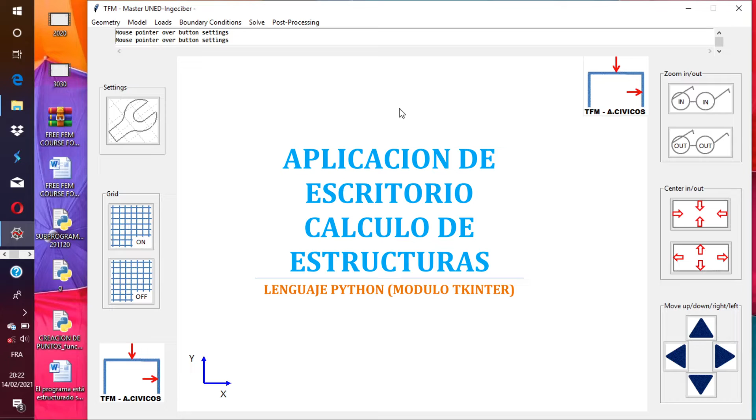Several master subjects offered me the possibility to learn how to code, first in Visual Basic and then in Python. The goal of this final master project is to go further and make software that can calculate any structure in 2 dimensions using the matrix method explained during the master.

The language I used in my final project is Python, for several reasons. Reason one: Python is an open source, general purpose scripting language. Reason two: Python is a high-level language, simple and very beginner-friendly. Reason three: it's very good for quick programming. Reason four: Python has a large amount of libraries available to be used in scripts, including linear algebra, big data analysis, numerical analysis, artificial intelligence, etc.

I chose a module called Tkinter to make the graphical interface of the program. As you can see, this is the main window of the program. I created a well-structured drop-down menu designed to make the program user-friendly.

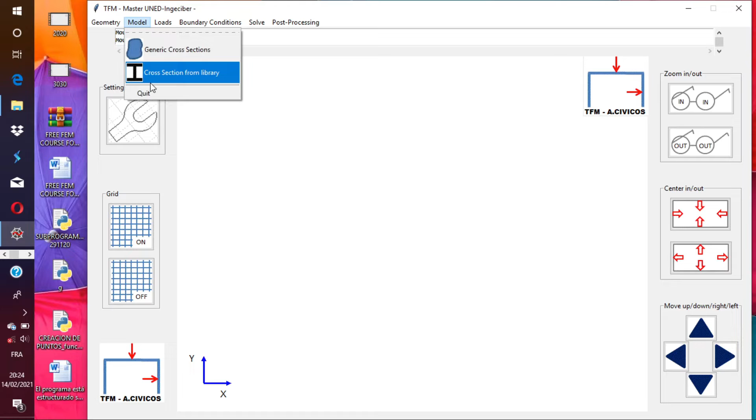The load menu allows you to introduce thermal load or gravitational load. This can be punctual, uniform, triangular, etc. In the boundary condition menu, the user can introduce a constraint of displacement or a constraint of rotation in the X, Y, or Z axis.

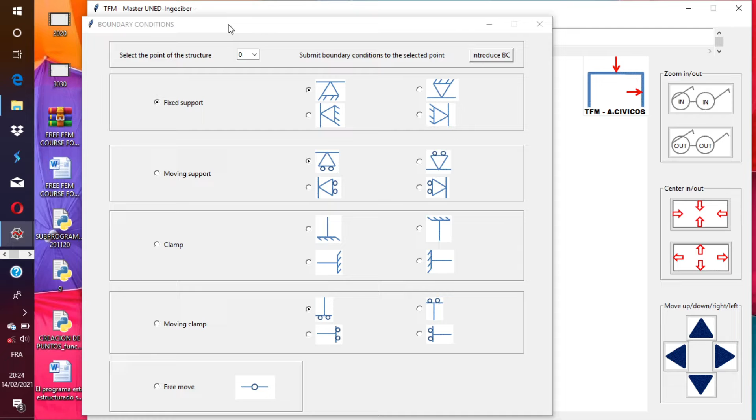The calculation menu uses the linear equations generated with the application of the matrix method in order to solve the structure. The user can also use the Cholesky method, which is more powerful in some cases.

For the post-processing menu, we can select the bar result, see the deformed model, and the total moment, the isostatic moment, and the hyperstatic moment diagram.

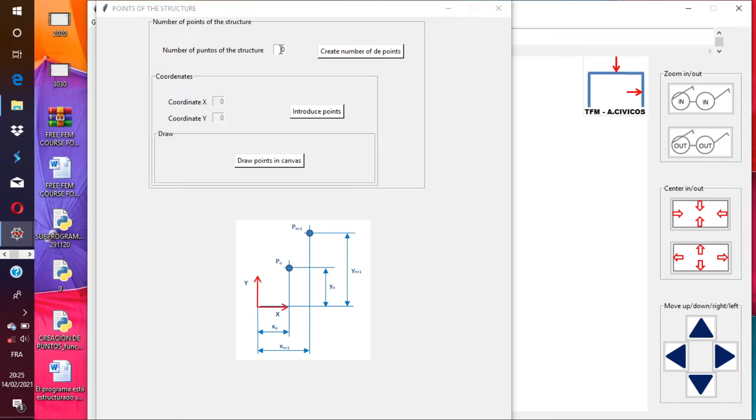Now we are going to demonstrate how the program works with a simple exercise. We are going to create only 3 points. Number of points of the structure: 3. We're going to introduce 3 points. The coordinate of the first point is 0, 0. The coordinate of the second point is 10, 0. And the coordinate of the third point is 20, 0.

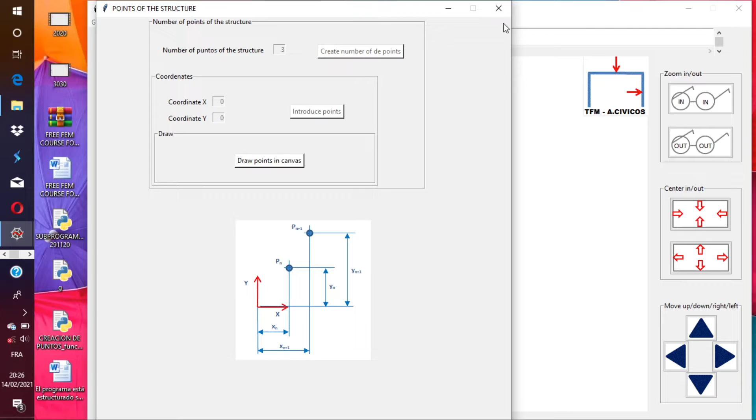Now we're going to draw in the canvas. As you can see, the 3 points have been created. Now we can move them with the mouse or with the center button of the mouse. We can zoom in or zoom out, also using the buttons located in the lateral frame, for example zoom in, zoom out, center in, center out, move up, down, left, right.

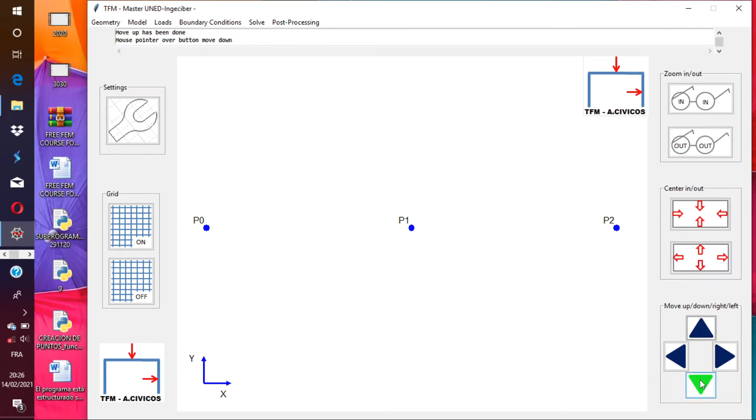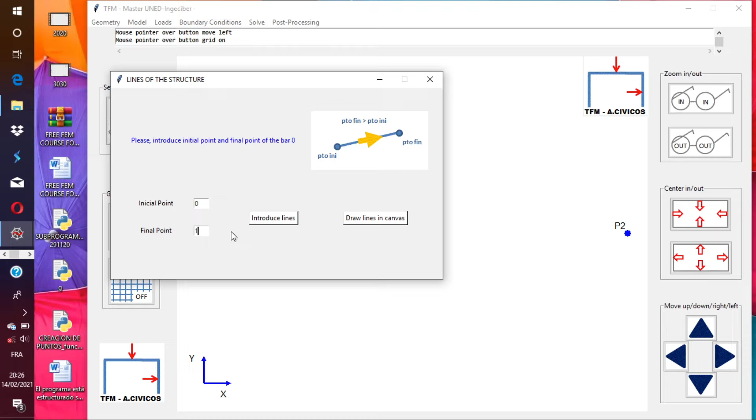The next thing we have to create are the lines that link the points. Geometry lines: the first line goes from initial point 0 to final point 1, and the second line goes from initial point 1 to final point 2. As you can see in the canvas, the lines have been created with orientation, which is very important, in the local axis.

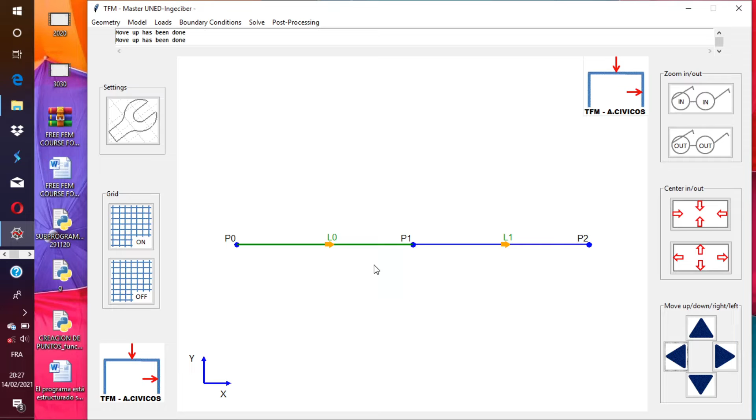We can create an additional grid with a chosen number of divisions and color. For instance, we can create 20 divisions with the color gray. But for me that is not very useful or interesting, so we are going to deactivate this grid.

Once we have created the lines, we have to give them the material and the cross section. For that reason, we are going to go to the model menu. We have two different ways to introduce the material and the cross section: generic cross section or picking a cross section from library. A cross section from library is very easy. Here we have to select one of the two bars we have created.

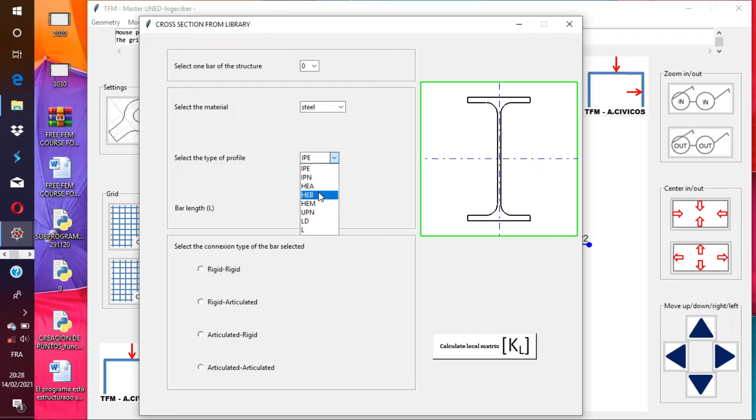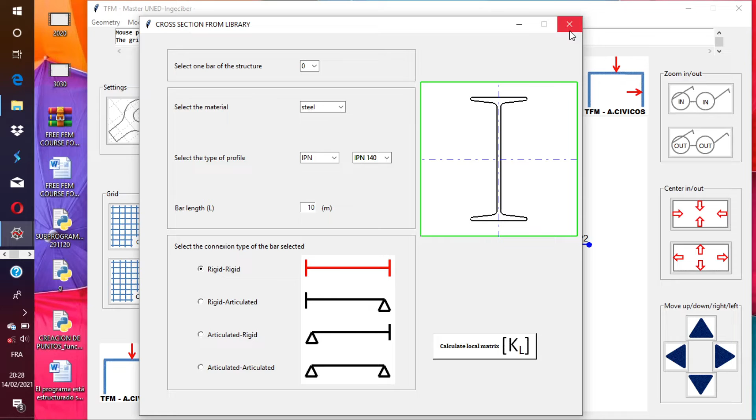We have to select the material, the type of profile, size. We have every single profile. We have to introduce the length and the connection of the bar. But we are not going to do it that way. We are going to select the other way.

Generic cross section. We select the first bar of the structure, the bar number 0. We introduce the Young's modulus. We introduce the inertia. We introduce cross area, and we introduce the length of the bar, and also the connection type of the bar.

Once we have introduced all data, we can calculate the bar matrix in local axis for the first bar, and for the second bar we are going to introduce the same data, so we can calculate the bar matrix in local axis, and then we can calculate the global matrix of the structure.

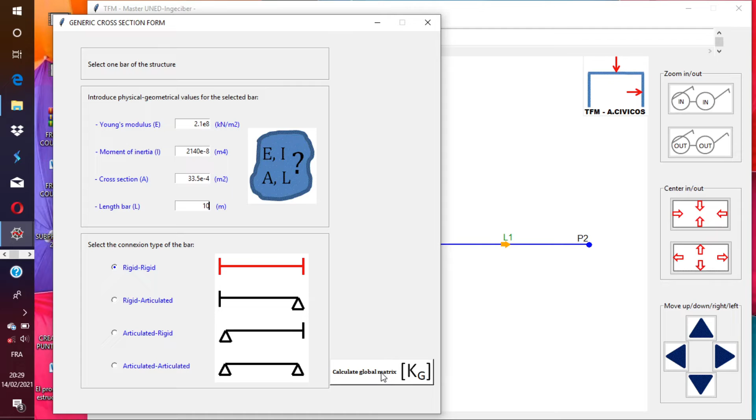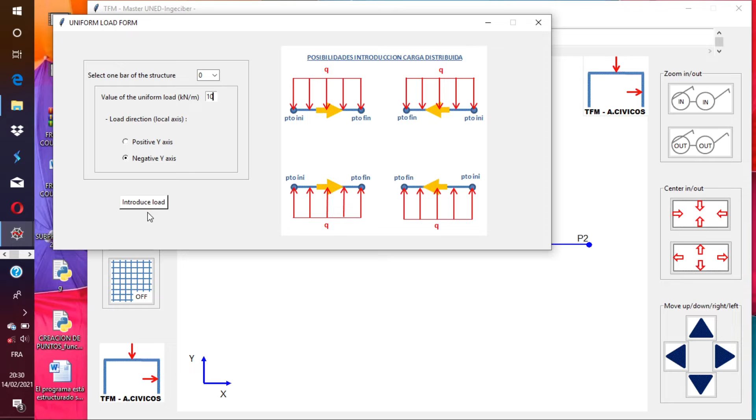The next step is to introduce the load. We are going to the load menu, and we are going to introduce gravitational load. Gravitational load, we are going to introduce uniform load in the two bars. For the bar number 0, we're going to introduce a value of the uniform load of 10 kilonewtons in the negative y-axis, and for the second bar the same thing.

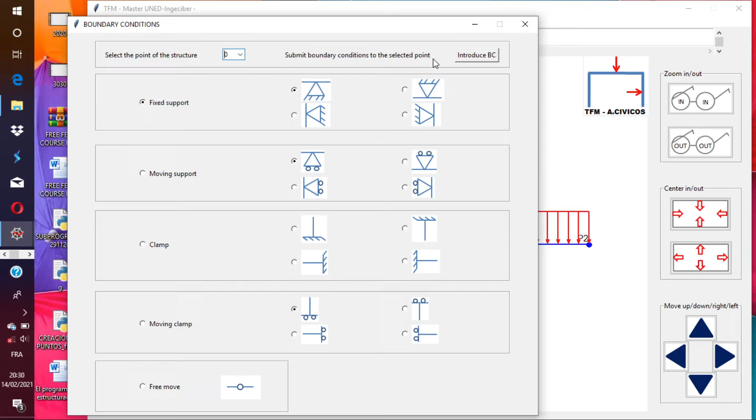And now to complete our structure, we have to introduce the boundary condition. We have 3 nodes. For the 3 nodes, we are going to introduce the simplest, the easiest, fixed support. That's this type. So we're going to introduce it for the 0, for the 1, for the 2.

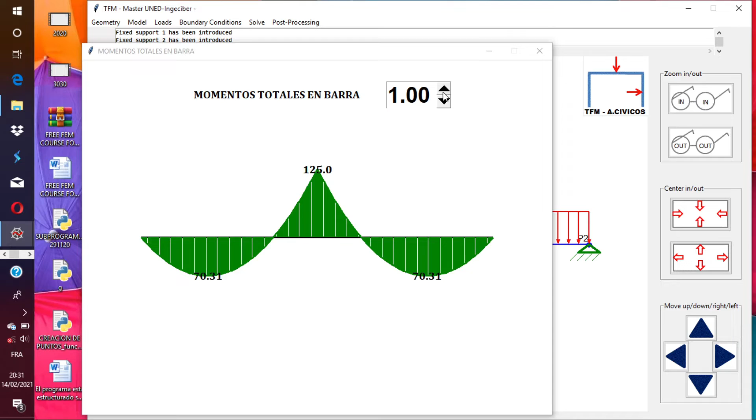Now we have to solve the problem with Cholesky or matrix method. We are going to use matrix method because it's very simple. And now we are going to see the moment diagram, the total moments. We can see the isostatic moments. We can see the hyperstatic moments. We can see a lot of things.

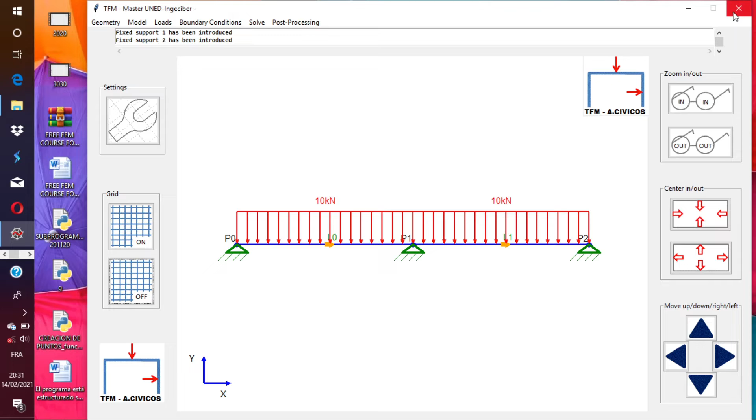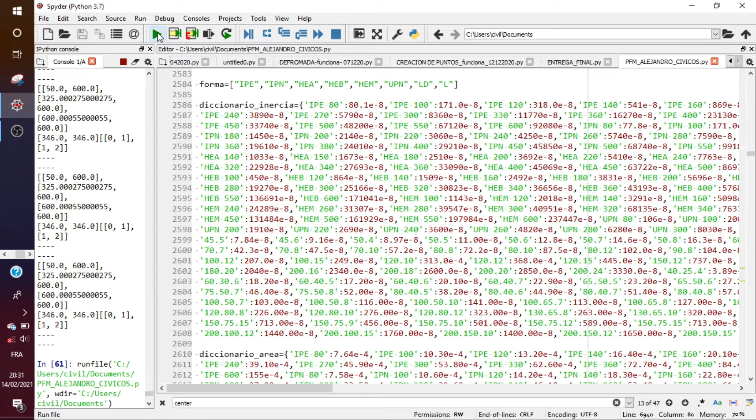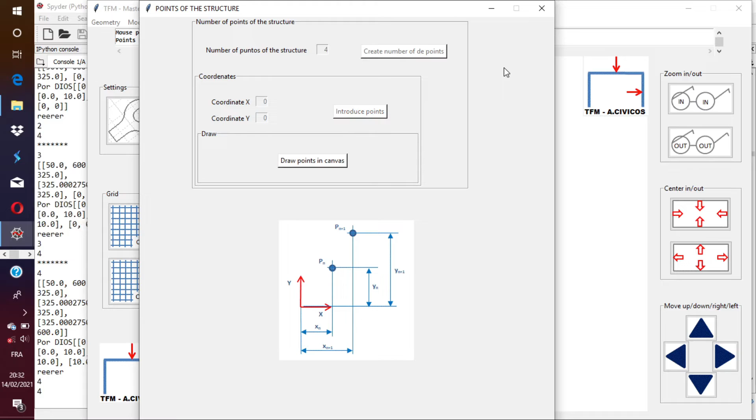But the last thing we're going to do in this presentation, we are going to calculate quickly another structure, a little more complex. I'm going to do it faster, only to show you. We're going to the lines 0, 1, 1, 2, 2, 3.

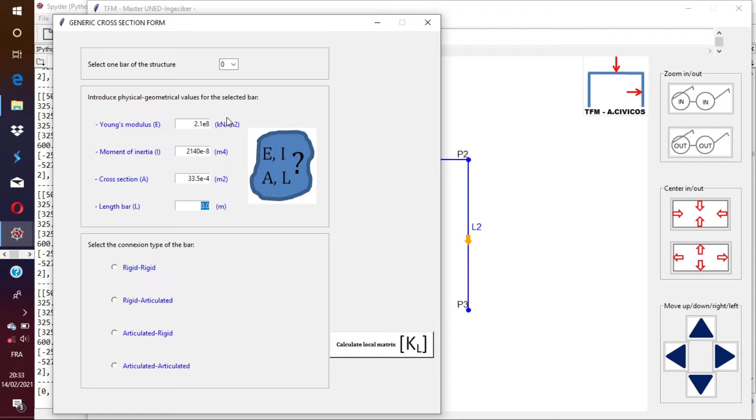Now we're going to select the cross section. Rigid, calculate for the first bar, for the second bar, and calculate the local matrix. Now we're going to create the loads, uniform loads in the second bar, the central bar, 10, in the negative y-axis.

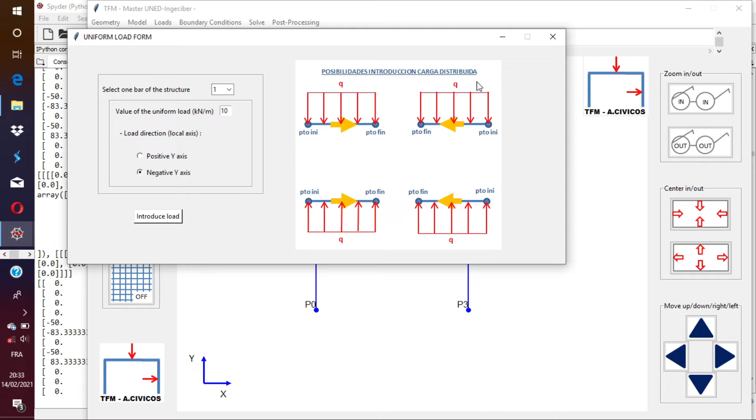And then we have to introduce the boundary condition, in this case, clamped for the 0 and the third node, and for the rest, free movement. Okay, and now we're going to solve with matrix method because it's a little structure, and then we're going to calculate the total moments.

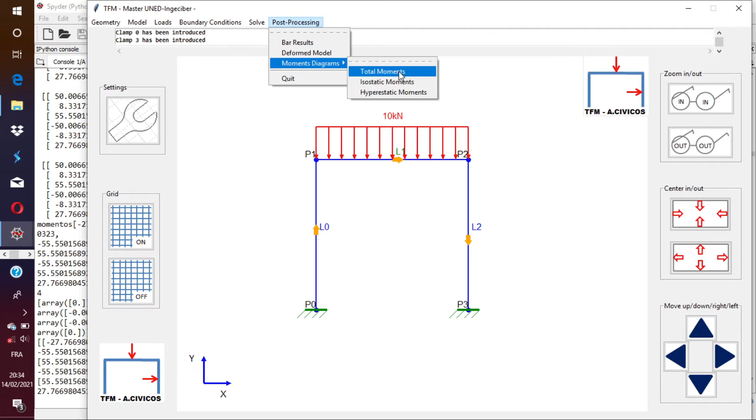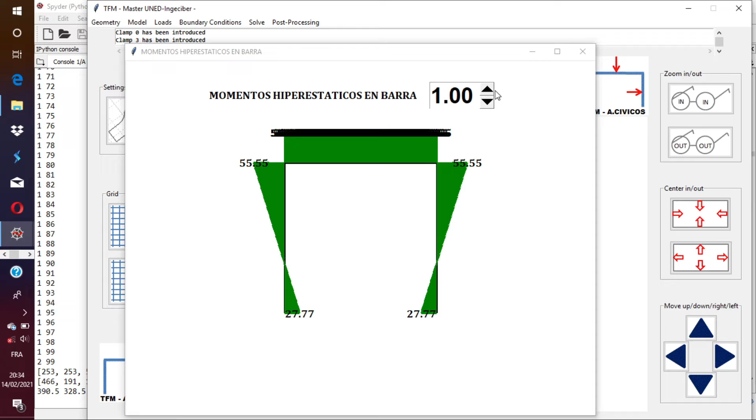We're going to show the isostatic moments. We're going to calculate the hyperstatic moments and the total moments. So that's a little bit my final project.

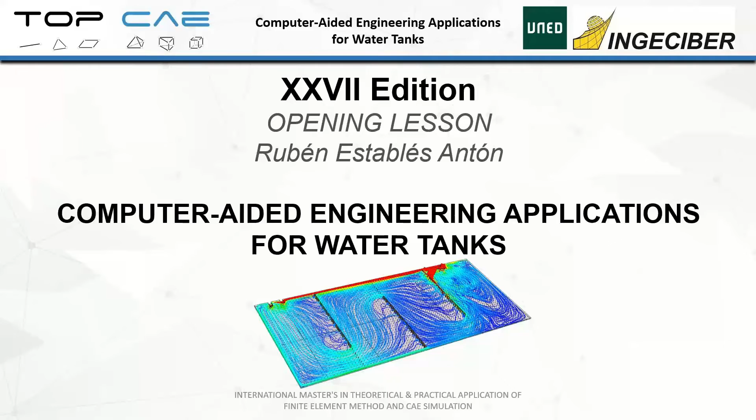Let me introduce myself. My name is Rubén Establés. I am a civil engineer, both bachelor's and master's degree. I have worked in aerospace, industrial, and civil engineering fields, and in all of them using finite element method and CFD simulation.

Also, I am a lecturer of dynamic and thermal analysis subjects of the mechanical branch with Patran and MSC Nastran. Actually, I am working as a research and development engineer in the TOP-CAE department, which belongs to INGECIBER company.

I have divided my presentation into 6 main parts: case study objectives, pre-process, which covers topics like inlet and outlet system, scale model, internal brick walls, fluid domains, geometry and mesh, and simulation hypotheses. Other parts are analysis, results, proposals for improvement, and finally, to sum up, some summary and conclusions. So let's get started with this topic.

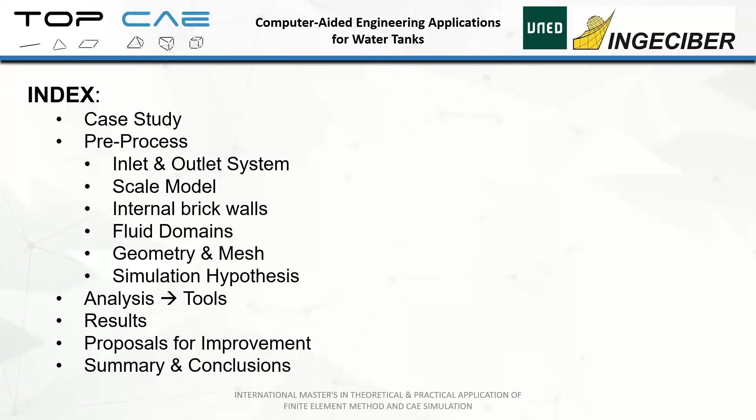First, I would like to talk about the objective of the case study, which is to evaluate the behavior of drinking water in a water tank using CFD simulation. Remember that the meaning of CFD is computational fluid dynamics. The input that we have to start was taken from drawings, photos, on-site visits, and in this case, data from a laboratory which studied the hydraulic behavior using a scale model.

The water tank has one rectangular chamber with the following main characteristics: dimensions with a length of 400 meters, width equal to 180 meters, and a height equal to 6 meters. An inlet system with a special configuration to reduce the water load when it enters into the tank through the pipes.

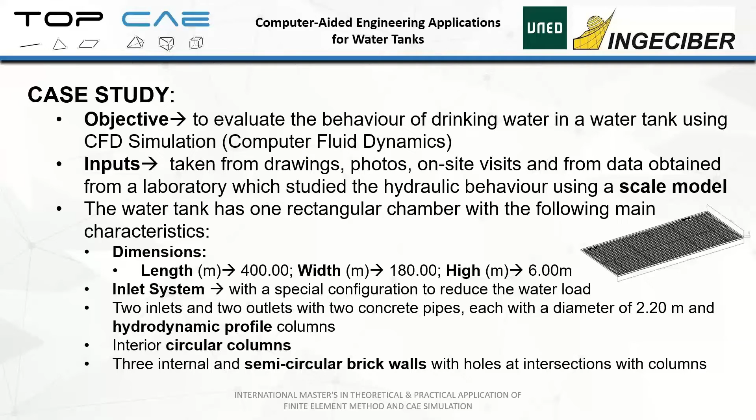2 inlets and 2 outlets, concrete pipes, each with a diameter of 2.2 meters and hydrodynamic profile columns around them. Internal circular columns, and 3 internal semicircular brick walls with holes at the intersection with circular columns. It is important to know that these 3 walls have straight walls at the end.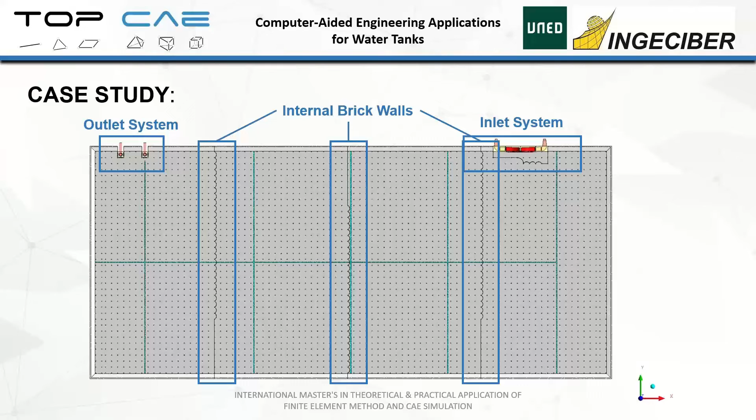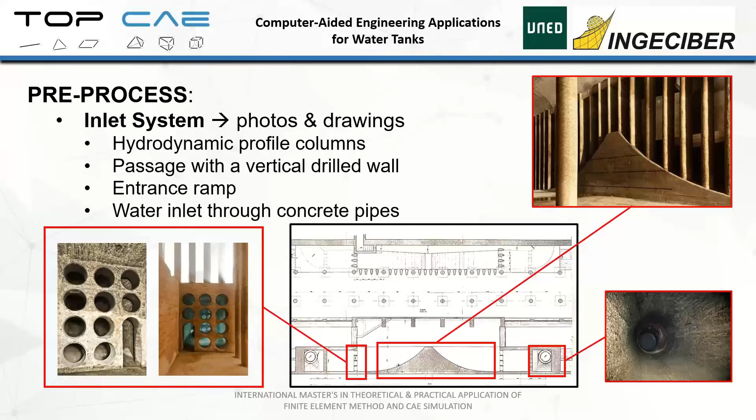The main parts of the water tank are highlighted in this image. These are the inlet system and outlet system, and to complete it, 3 internal brick walls. Look at the inlet system with hydrodynamic profile columns, a passage with a vertical drilled wall, the entrance ramp, and the concrete pipes. This slide shows some images of the real water tank and the geometric model made with the help of DesignModeler software.

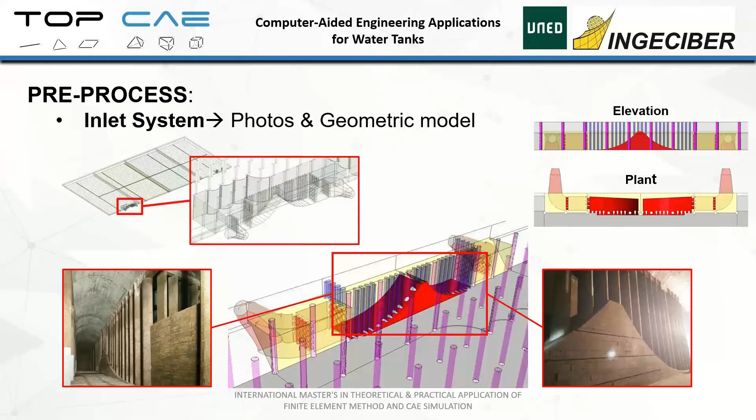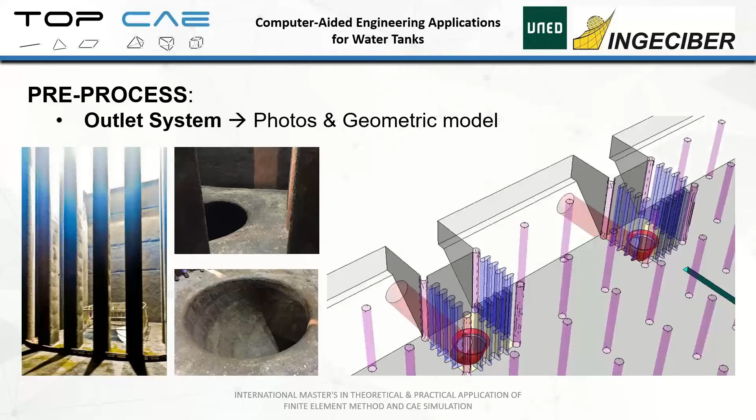The next slide shows real and model images of the outlet system, and here you can see the outlet pipes and the hydrodynamic profile columns around them. As I told you before, during the design phase, a scale model was made and it was used to study the real hydraulic behavior of the flow. In these figures, you can see the civil engineers working with this scale model.

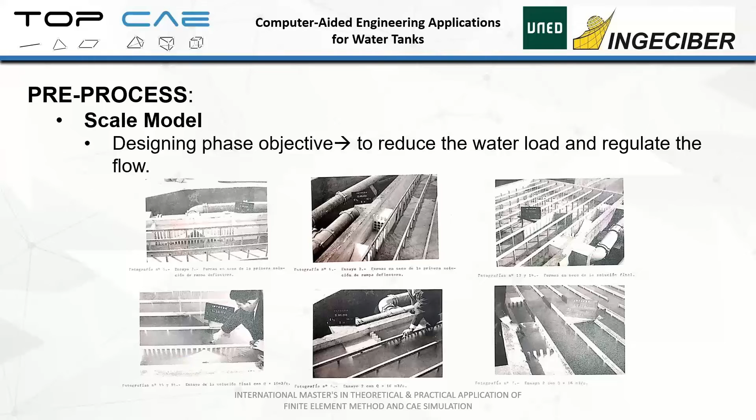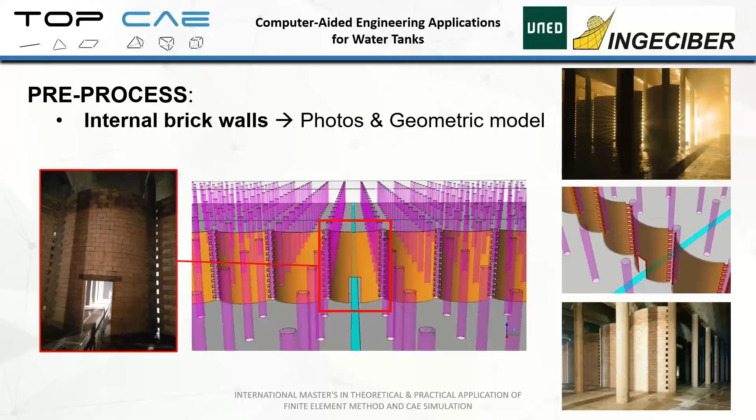3 internal semicircular brick walls are inside the water tank and divide it into 4 main parts. Remember that these walls have straight walls in their last spans. Due to its external configuration, the model is divided into 7 fluid domains that work together like one body. They are connected at the areas indicated by arrows in the images below.

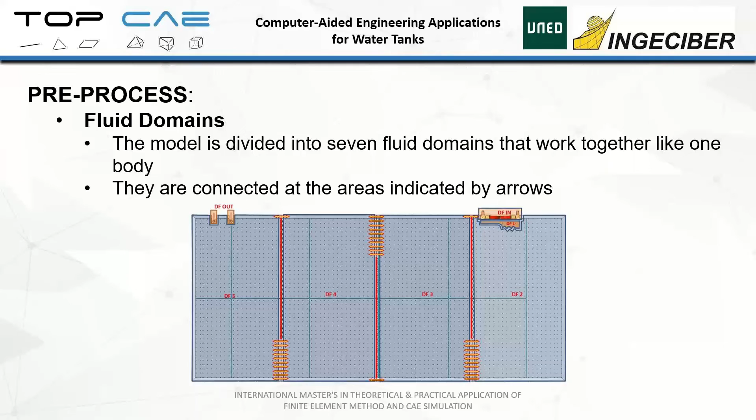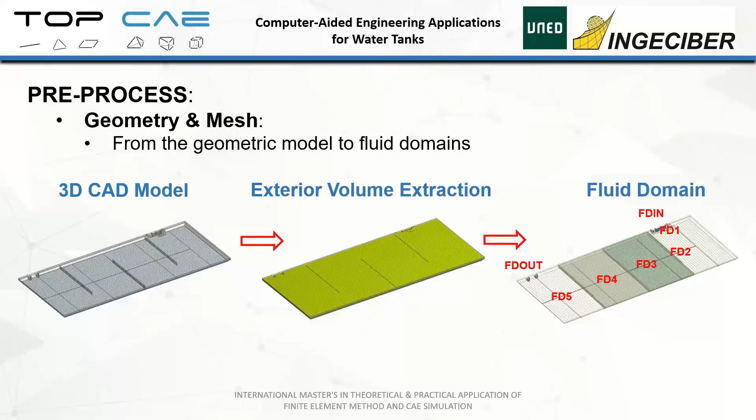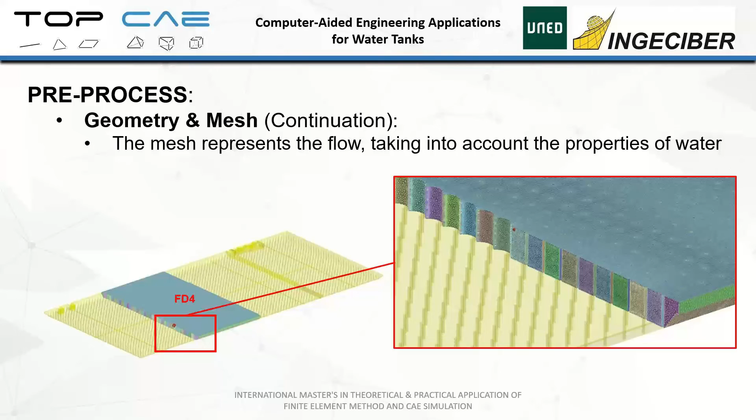To finish with the pre-process part, I would like to talk about some simulation hypotheses. It is a steady state analysis. The mass conservation law is fulfilled. Flow in is equal to flow out. It is important to define the mesh continuity between fluid domains, as you can see in 3 images.

And finally, I give you some main data. For example, water level is equal to 6 meters. Flow in is equal to 1.4 cubic meters per second. The flow out is equal to 5.1 cubic meters per second. The volume is equal to 418,000 cubic meters. And finally, we achieve a renovation time equal to 64,000 seconds.

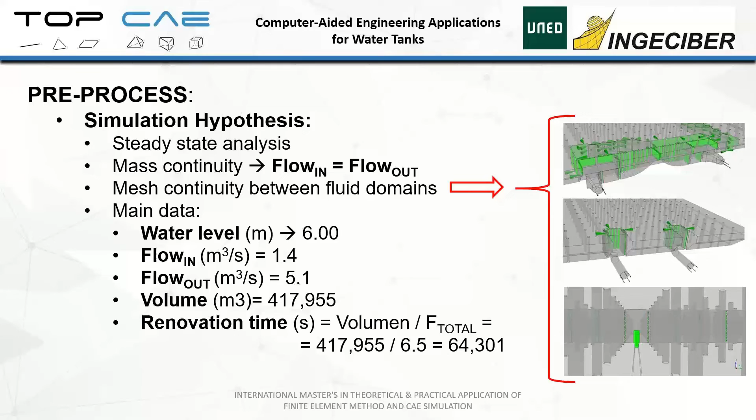Now let's move on to the next topic, which is analysis. The tools that are used to complete it can be divided into software and hardware. The software: DesignModeler is used to define the geometry and mesh, this is the pre-process step, and ANSYS CFX to do the analysis and post-process. The hardware is a Windows server, very powerful and robust, because the analysis takes 5 days and the size of the result file is equal to or more than 10 gigabytes.

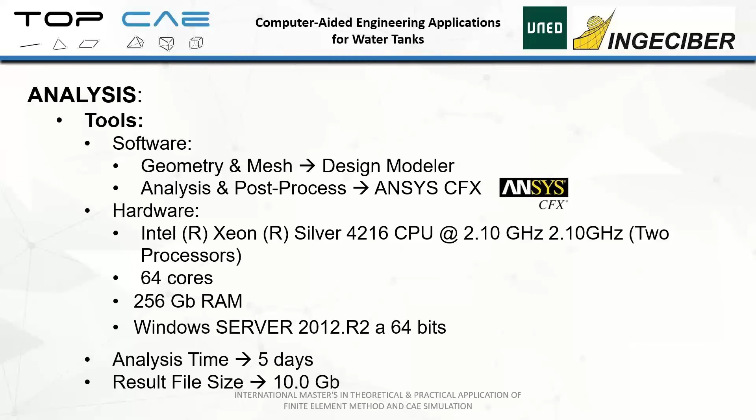So that's covered everything I want to say about the preprocess, and I'm going to focus on results. As you know, one of the most important steps of any analysis is to post-process the results obtained in order to get some conclusions. Here is shown the streamlines with a maximum value of velocity equal to 5 centimeters per second, and it is possible to confirm that the inlet system does not regulate the flow.

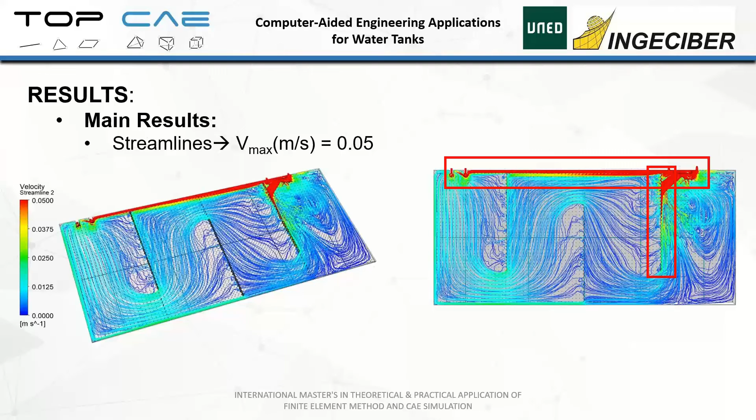So the hydraulic behavior is subjected to two main flows, one along the perimeter, highlighted with the horizontal square, and another directed to the first brick wall, highlighted with the vertical square. Some images with the streamlines born from inlet 1 and inlet 2 are shown in this slide. The streamline born from inlet 1 is highlighted in green, and in the same way, the streamline born from inlet 2 is highlighted in purple.

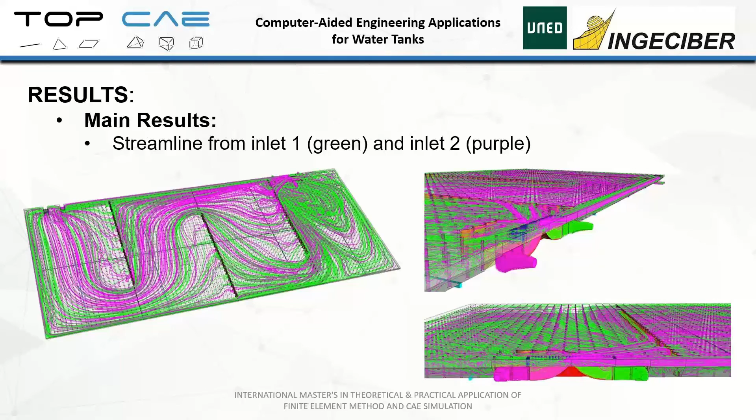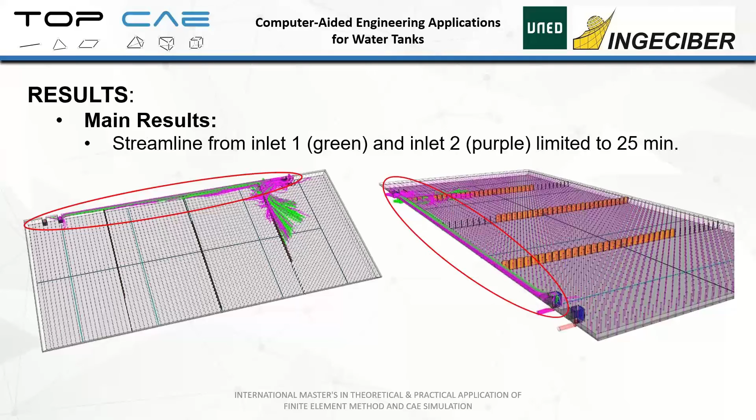A circuit between the inlet and outlet is created because the internal walls do not cover the entire width of the water tank, as shown in this image, which represents the streamlines born from two inlets with a limitation of 25 minutes. Velocity vectors with a maximum of 1 meter per second are represented in this image, and you can see here that the flow goes through the hydrodynamic profile with the highest velocity.

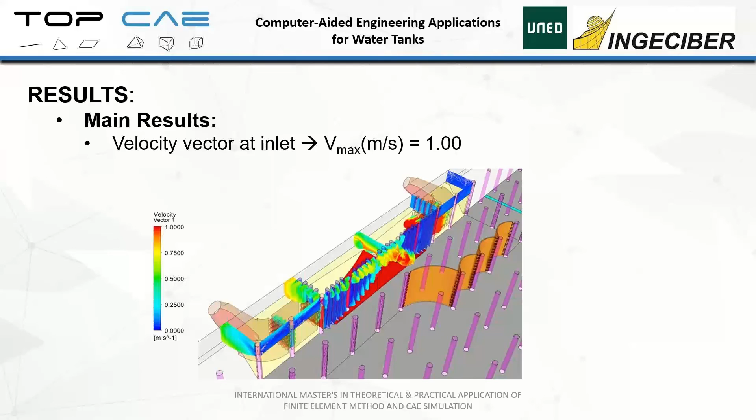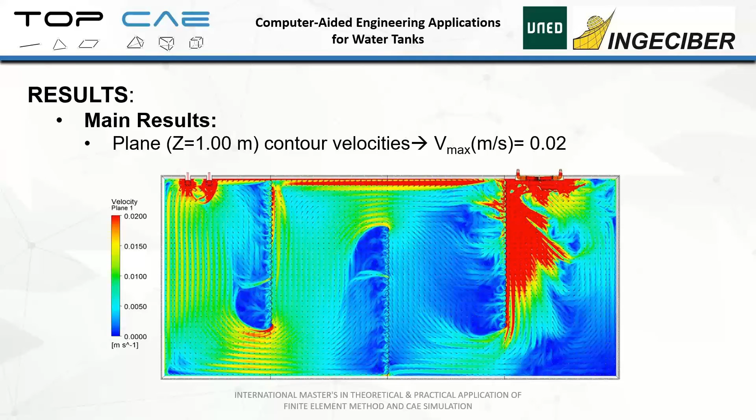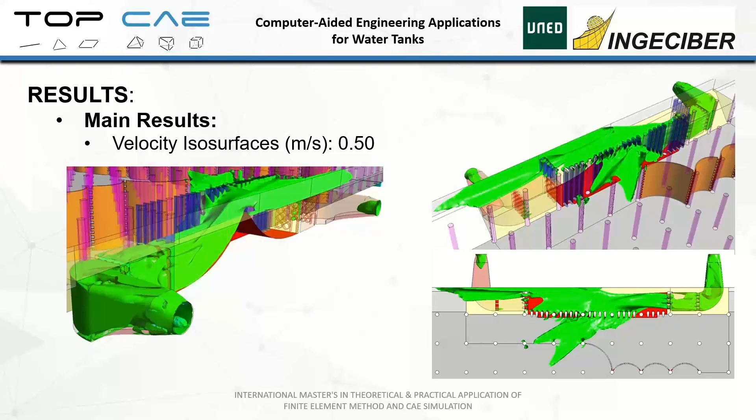In the same way, a plane with contour velocity is represented with a maximum velocity value of 2 centimeters per second in order to evaluate the impact of the brick walls on the flow behavior. From here, the following 9 slides show the results related to velocity isosurfaces with different values of velocity from 1 meter per second to 2.5 millimeters per second. It is really important to evaluate them because the velocity isosurfaces represent the volume which has the same velocity value independently of its direction, showing us where the highest amount of lowest flow velocity is.

Let me expand on this topic. We have to take into account that the correct behavior of a water tank has to avoid areas with low velocity in conditions of water recirculation, because these areas usually gather sediments, break the uniformity of water treatment, reduce the water quality, and finally produce dead zones in the water tank.

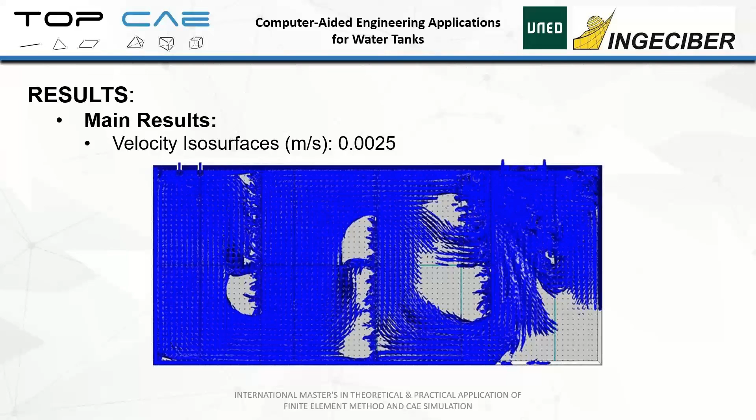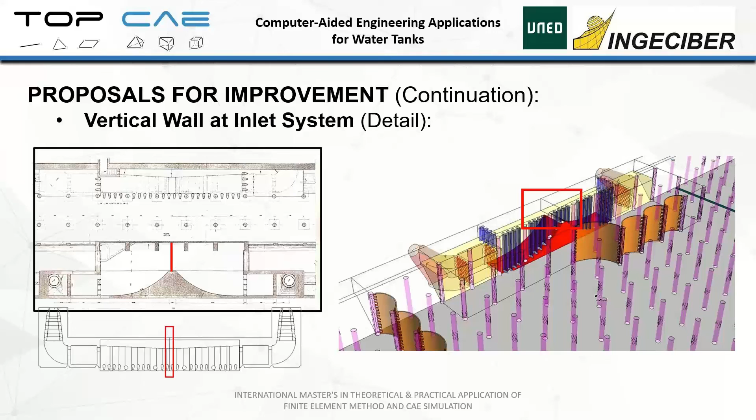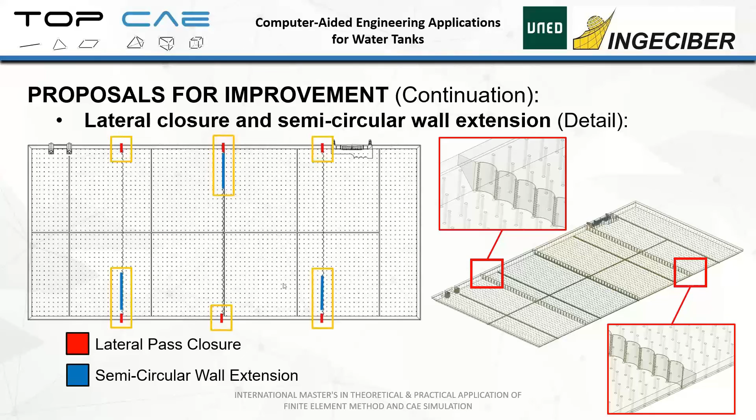Now let's turn to a new topic covered in this presentation, called proposals for improvements. The principal proposals are to add a vertical wall at the upper part of the entrance ramp, and the other one is to extend the circular brick walls to cover the whole width of the water tank. This way, the lateral pass is closed. A new fluid domain configuration is defined, divided into 7 fluid domains that work together like one body.

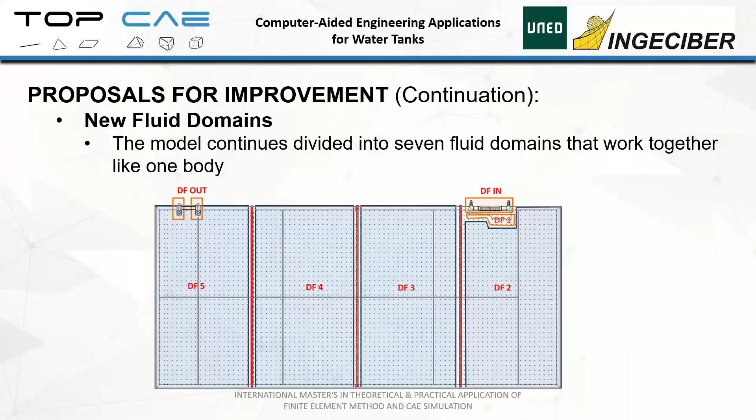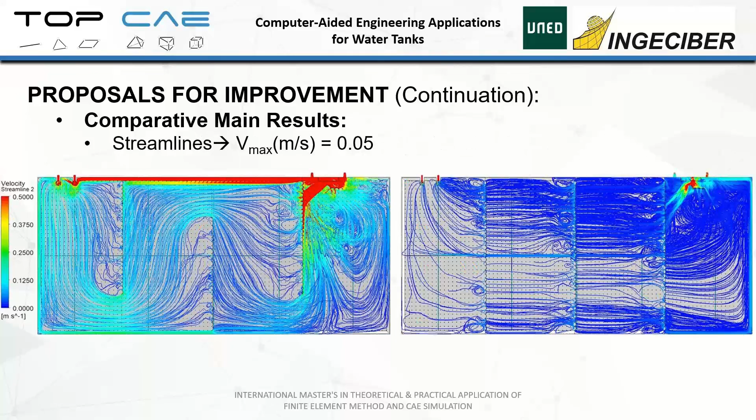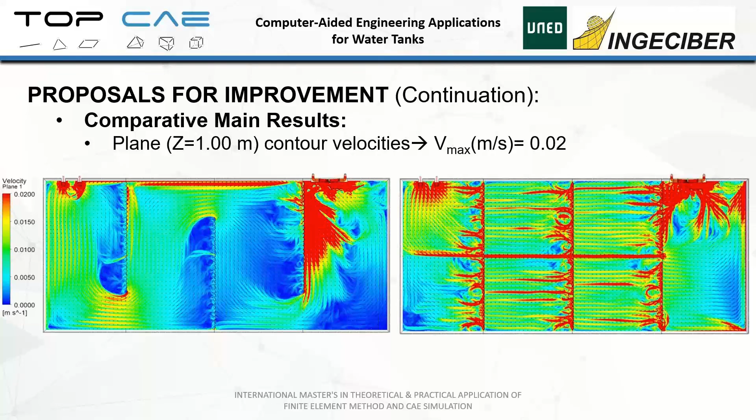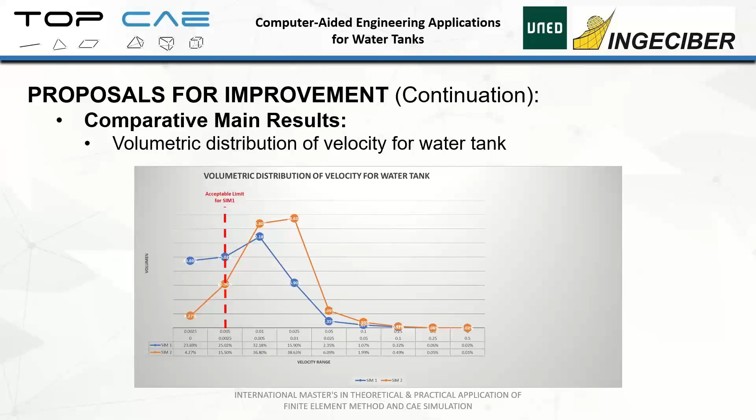The following 2 slides clearly show the improvement of flow behavior and represent the streamlines with a maximum velocity value of 5 centimeters per second and the plane with contour velocity with maximum velocity value equal to 2 centimeters per second. This graph clearly shows that if the proposals for improvements are implemented in the model, it will achieve more volume of water with higher velocity. Remember that this is the main goal that we follow in this kind of analysis for water tanks.

Finally, to sum up, I'm going to explain the most important conclusions that we get from this couple of analyses. This relates to what I was saying earlier. Taking into account the results from the current operation situation, simulation number 1, it is possible to conclude that the inlet system does not regulate the flow, so the hydraulic behavior is subjected to 2 main flows, one along the perimeter and another directed to the first brick walls.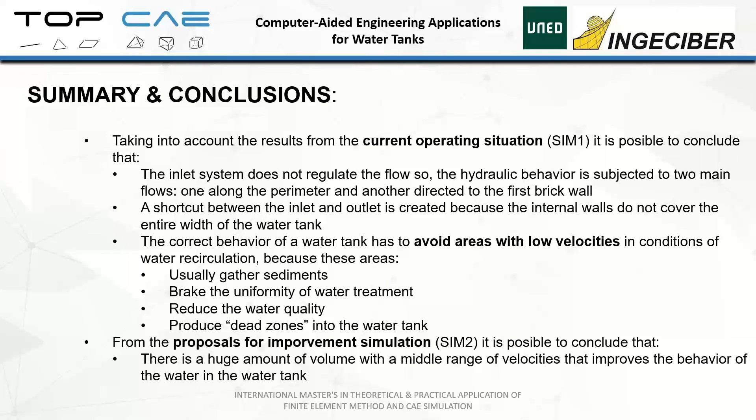A shortcut between the inlet and outlet is created because the internal walls do not cover the entire width of the water tank. And the correct behavior of a water tank has to avoid areas with low velocity, because these areas usually gather sediments, break the uniformity of water treatment, reduce the water quality, and produce dead zones in the water tank. So from the proposals for improvement, simulation number 2, it is possible to conclude that there is a huge amount of volume with a middle range of velocity that improves the behavior of the water in the water tank. Nothing else from my side.